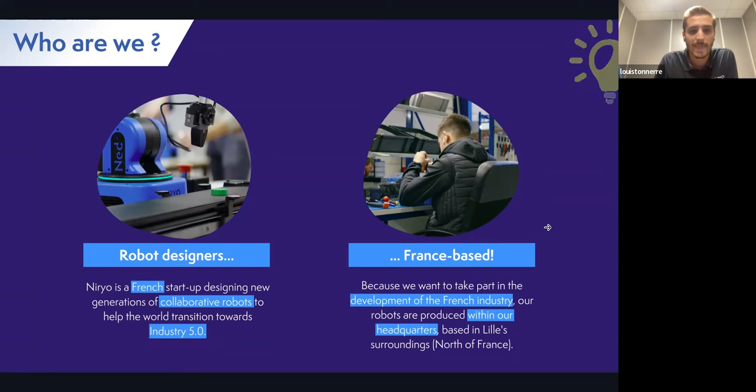Niryo is still a startup. Even though we're a pretty small company, at our scale we're already 40 employees, which is a big increase in the last year. I've personally been here for more than a year now - when I got here, we were like 25 employees. We've been employing a lot for the past year, really developing. Two-thirds of these employees are in research and development, because in the field of robotics, technology is always important to improve, and we always have to be at the cutting edge of technology, constantly increasing the quality of our products.

Made in France, based in France, manufactured in France - that's a real good aspect for us. And in terms of selling the robot, it's important to put in favor the French quality. We've sold more than 2,500 robots in the past 4 years. We were actually created in 2016, but the first robot came out in 2018.

I'll come back right after this slide to tell you more about the history of our robots and in which order they came out. For the past 4 or 5 years, we've been manufacturing and sold over 2,500 robots, in more than 60 countries. In terms of percentage, that's about 70% of the total robots sold on the international scale. This goes with distributors and partners, like the Brainary, that really help us to be present in certain countries, certain areas of the globe that are impossible for us with our 40 employees to really touch. It's important that we have long-lasting partnerships and ambassadors that really represent the brand, represent Niryo abroad, and in this case, in Australia, New Zealand, and even further.

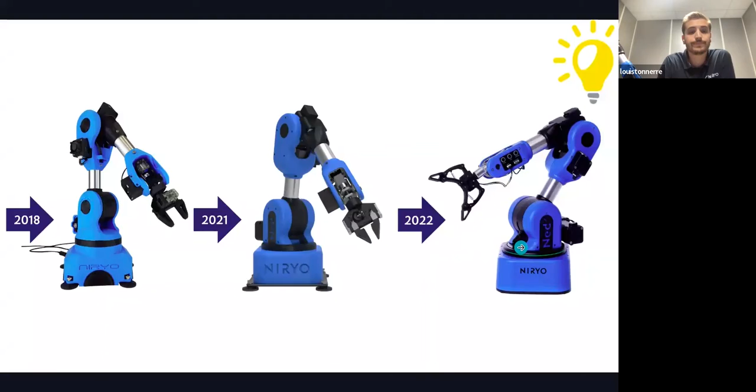So like I said, we have two business units here at Niryo. The first one, with this robot, is education—really to target teachers, to teach, experiment, and prototype industry 4.0, now going towards industry 5.0. That's one business unit. The other is the professional offering, more towards the industrial side.

This one is still under development, but to give you a little peek into the future, we're looking to develop some semi-industrial robots, really with the same DNA as this one, but more compact and more fitted to some use cases that are not currently fulfilled by the industrial robots available today.

If we look at the educational part of our robot, with Ned2 now, 76% of our sales are for higher education—universities, technical schools, high schools, even younger users depending on the country. In France, for example, we're quite late getting into robotics at a younger age, but more and more we're seeing high schools using and teaching robotics, to give students an early sense of using robots they'll find in the industry tomorrow if they want to work in that field. That represents 3/4 of our sales, and the other 1/4 is for companies.

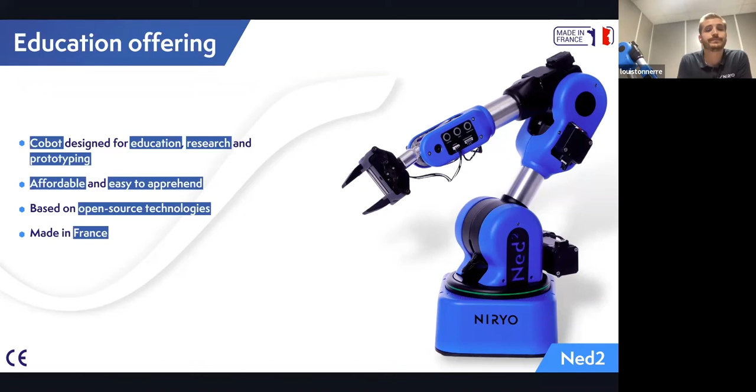Very important to work on the robustness and quality of our products and robot. So we redeveloped the aluminum structure to make it really robust, because it's a robot that you move around from classroom to classroom, and probably from school to school if you teach in multiple schools. It's important for it to be moved easily and not be fragile, to be able to reuse it in another school or classroom. This is why we worked on new materials, constantly making it more robust to be moved around, but also to last longer in terms of functioning.

The team is growing more and more, so now we have the capacity and the number of employees we need to test and improve the repeatability and accuracy of our robot. Now our robot has a repeatability and accuracy of 0.5 millimeters, everywhere - meaning if it goes to maximum reach, we'll have the same efficiency, accuracy and repeatability as when it's close to the base, which is easier for the motors since they need less force. It was important for us to really work on the efficiency of the robot.

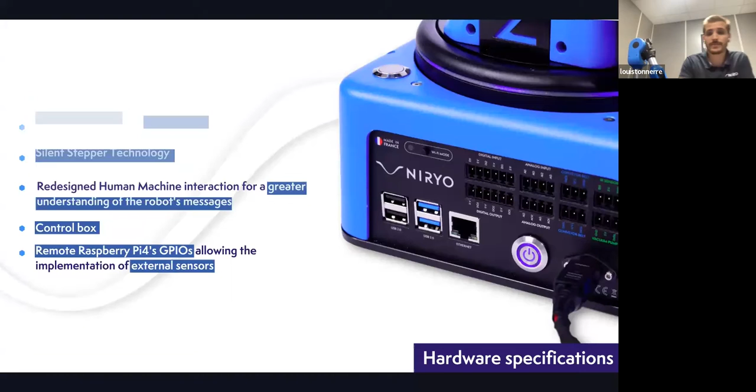And last but not least, we're based on Raspberry Pi 4. So that's in terms of what's inside the robot. We're based on ROS, and inside is a Raspberry Pi 4. All of our robots before were based on ROS, and we're based on Raspberry as well, so it was important for us to continue on that path.

It's compatible with Windows, Linux, and Mac, so that's not an issue if you want to use whatever computer you want. And like I said earlier, we're affordable in terms of price and also accessible in terms of usage, and that goes with a wide range of programming languages, from the easiest one, which is Blockly.

So we developed our software and it's based on Blockly, it's a bit like Scratch. I don't know if you know what it is, let me know in the comments if you're familiar with Blockly or not. But it's really the easiest way to learn robotics. It works with little blocks that you add up - you take the position, save the position, press play, and it will run the program automatically.

And then after, it gives you the possibility to communicate through Modbus, MATLAB, Python. And if you want to go further, C++, and of course, communicate through ROS.

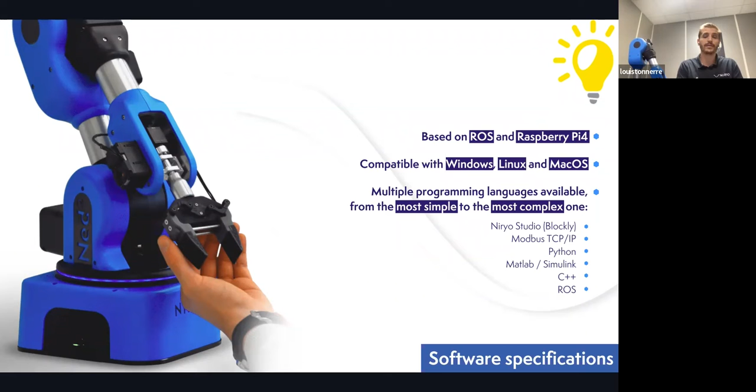So like you find in the industry of tomorrow, there's a lot of different end grippers that you can work with on a robot. It goes with the basic one, which is the custom gripper that is sold with the robot, by the way, so you don't have to purchase that. It comes with the robot. This custom gripper actually gives you the possibility to 3D print your own jaws.

So as you can see here, the edge, well really the jaws of the gripper, is 3D printed. We can give you the STL files thanks to our GitHub, and you can, of course, print your own jaws and really create your own use case using your own gripper. So that's a pretty sweet aspect of our robot, thanks to the 3D printed material.

Then we have a large gripper, which enables you, like the name says, to grab larger objects, and an adaptive gripper if you want to, for example, grab a can - this one will go around it and really get the totality of the object, trying to surround it as much as it can. And then after, you have, of course, electromagnets that you find in the industry of tomorrow with industrial robots, and a vacuum pump that uses suction to do pick and place with the suction technology.

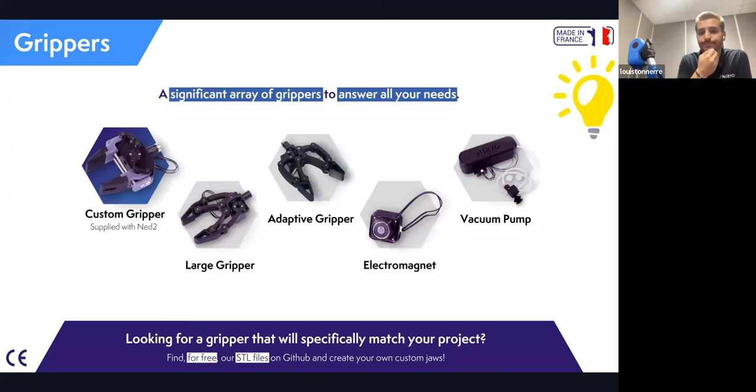One of the things we developed, an aspect that was important for us to redesign and rethink, was the capacity to connect the grippers. Now it's magnetic, an easy connect system. All you have to do is stick it in, and it will automatically attach with the magnet functionality. Before, we just had a tip that you put in - it worked well, don't get me wrong, but it wasn't as reliable. If there was something stuck inside, it wouldn't fit as well. Now, thanks to the magnetic system, it's really easy to use. You can also see what's inside, so if something's stuck in there, you can get it out easily, whereas before it was a bit harder. Really redesigning the efficiency and ease of use of the robot is what we put forward into this Ned2.

Before with Ned, we didn't have this - we were constantly in free mode, meaning the robot had no motor resistance, no torque resistance. Now once the robot is turned on and ready to be used, it has motor resistance, meaning you can't move it around. The motors will be functioning and you can't move the robot because it's under torque resistance.

So now what we did is add a free motion button. All you have to do is keep pressing the button, and then you're able to move the robot with one hand, whereas before you had to use two hands to be more accurate. Now if you want to hold this position, all you have to do is let go of the button and it will automatically activate the motor resistance and stop moving. This is easier for students to set positions when using Blockly, for example, and makes the interaction better than having to press on the computer to activate and deactivate the free motion technology we had on the previous robot.

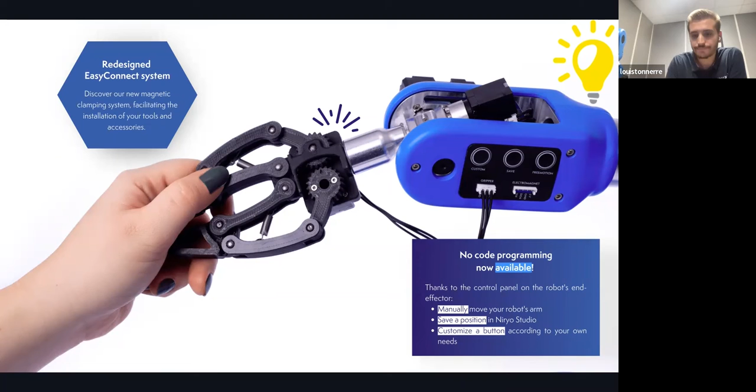So like I said, a complete ecosystem - the goal is to come close to what you'll find in the industry of tomorrow, industry 4.0, and move towards industry 5.0. And that goes with the vision set. This is a little camera at the edge of the robot, like you can see on the slides. We call this a dynamic camera - it's not a camera facing outside the scene, just facing a workspace and functioning with the robot from outside. It's really on top of the robot and moves with all the robot's movements. This allows you to go further into image processing, machine learning, and of course artificial intelligence, with some use cases we'll show right after this.

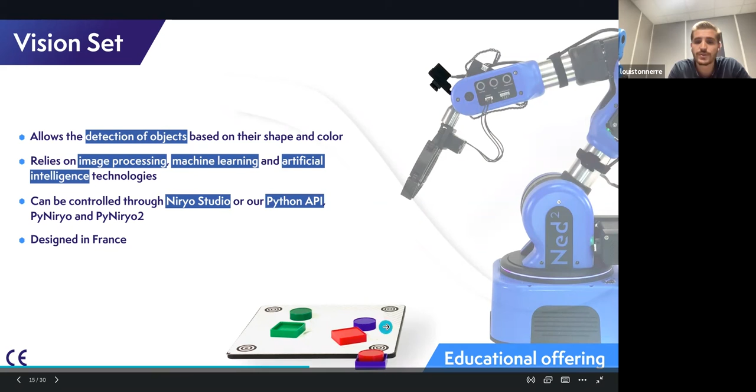The goal is really to use and work on image recognition - our camera works with images, so shapes and colors on the workspace. It's able to recognize shapes and colors to do pick and place automatically based on those shapes and colors. For the artificial intelligence here at Niryo, we work with TensorFlow - I'll get back to that right after.

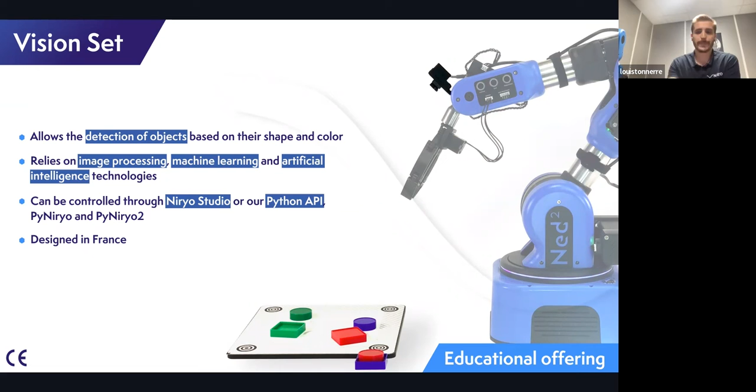And then last but not least is our Conveyor Belt. Once again, the goal is to really get what you'll find in the industry of tomorrow. So that's a Conveyor Belt to reproduce all the production lines, prototyping production lines at a lower scale.

As you can see, there's some tips here directly. There's some marks on the Conveyor Belt, and the goal is really to enable the customers, the teachers and the students that will use this ecosystem to use both the robot, the camera, and the Conveyor Belt at the same time. These little landmarks right here are for the vision set to be able to operate directly on the Conveyor Belt. And there's also an infrared sensor. When there's an object that goes through, it just stops automatically.

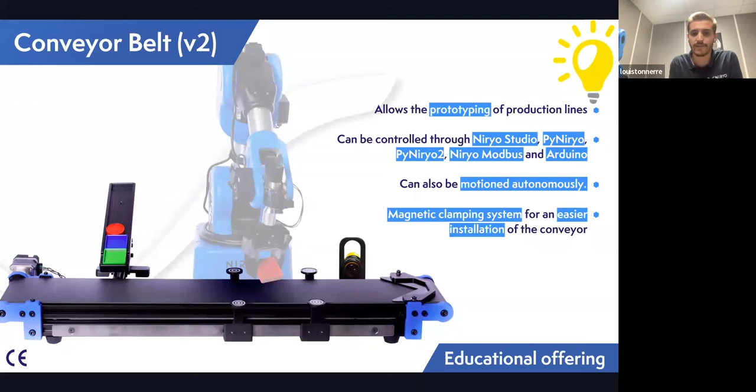So like I said, Niryo is both a robot designer, but also the software that goes with it. So this is Niryo Studio, the interface that we've been developing with our robot, around our robot. Like I said before, it's based on Blockly. For those of you that are not familiar with Blockly, it's a bit like Scratch. You can see a little example right there that's going through.

So we work with little blocks that are predefined that we're constantly working on to develop. Then all you have to do is just take the position you want on the robot, press the save button, and a little position with all the axes that you can see here in blue will appear. You just add them up, and then press play, and it will automatically run the program. So it's a very easy, very efficient way to learn programming and to learn how to functionate with a robot directly with our Niryo Studio.

There's also the capacity to see if there's an issue, the status, the updates, to program the conveyor, like I said before, and also the vision set. So this is where you'll have all the information of all the ecosystem of Ned2 directly on Niryo Studio.

And by the way, it's also free. You don't have to really own the robot to be able to download this. All you have to do is go on our website, there's a download area, you can download this. Of course, it won't work if you don't have a robot, but you can already see the interface, see a little bit how it works, and you can already have a good idea of the blocks that are available for your students if you're looking into purchasing robotics equipment for your classroom. So you can already have a good insight, a good vision of what we do on Niryo Studio with Blockly.

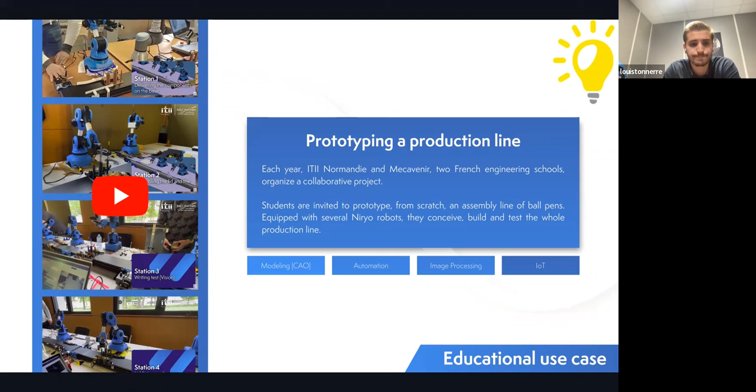To go further, there are a lot of other use cases. I'm not going to go through all of them, but we've been working a lot with a company here called Alten. They work a lot with digital twins and do a lot of work, so I encourage you to go watch online what they have to propose. They also work a lot with artificial intelligence.

The last use case is some prototyping from companies. Like I said, 24% of our customers are companies, and this is an example of one that sticks stickers on small mechanical parts. Before, they had to use big industrial robots for just a small task like this. So they used our robot to show and prove you can use smaller robotics equipment to do a plain simple pick and place with a suction or vacuum pump, with a little roll-up on the gripper, the yellow part, that rolls up to stick the sticker. This is a good example of what can be done, proving you don't need big, oversized, expensive industrial robots for small use cases like this.

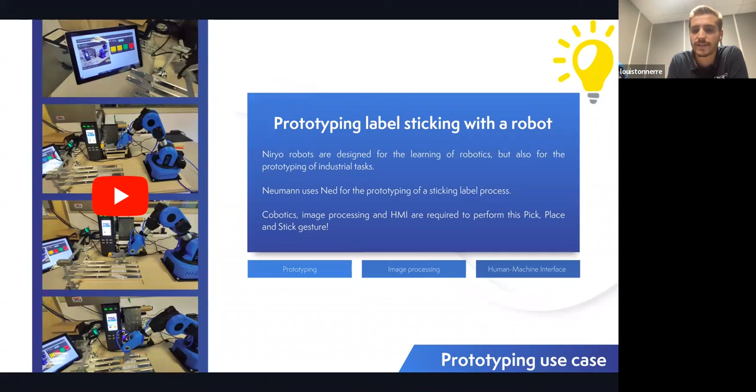And of course, the tutorial of MATLAB that I talked about earlier. Once again, if developing use cases around MATLAB and teaching MATLAB is something you're looking into, I encourage you to go watch online what we have.

And like I said, TensorFlow. A lot of professors use our robot to develop and work with artificial intelligence thanks to the camera. There are a couple of tutorials using TensorFlow, but more than that, there's also a professor from a school here in Lyon who used our robot to play Connect 4 using artificial intelligence. I encourage you to go watch this online, it's a good example of what can be done with our robot using that technology.